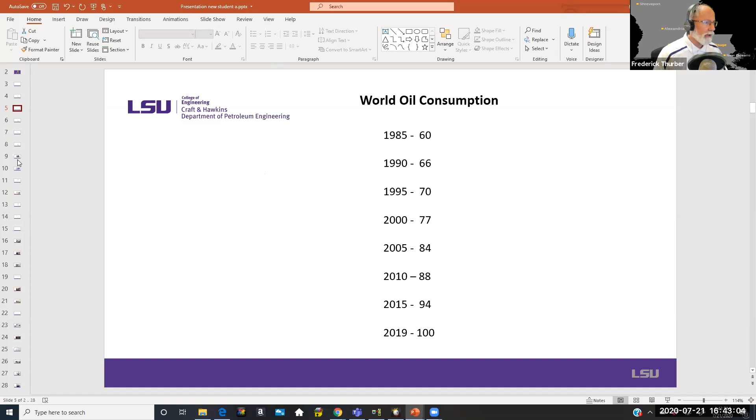We could say the same thing about India, another huge country population-wise. But also, what about other third and fourth world nations? Without enough energy, without enough raw material to build the products we use today, third and fourth world nations don't have a chance. So I believe this is a wonderful career path as you move forward, and we'll talk more on that as we go.

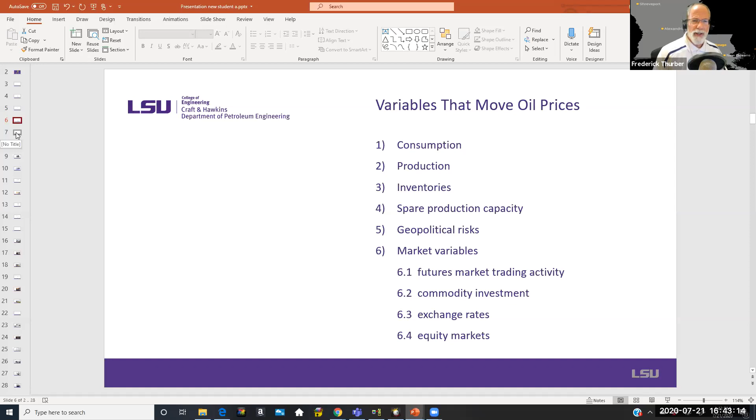The second one's production. Some people thought, well, maybe we're just running out of oil because we've produced it all. But if you look at U.S. crude production from 1940 to 2019—actually from the beginning of time, that first well, all the way up—it was increasing until 1970, when we hit a record in the United States of 9.64 million barrels of oil per day. Now if you look, we started to slide.

However, that slide decreased and you saw two small humps right here. What happened is the price of oil at this point was very high and a lot of people were investing in finding new sources of oil. We had in the early 70s the Arab Oil Embargo, and the price of gasoline doubled in a very short period of time, almost overnight. Then we started seeing a decrease in production in the mid 80s, and that decrease continued until about 2008.

In 2008 we started to see an increase, a rapid increase. In fact, in 2019 we were producing 12.23 million barrels of oil per day, a new record for the United States. Why were we doing this? We were doing this because we have engineers to produce oil.

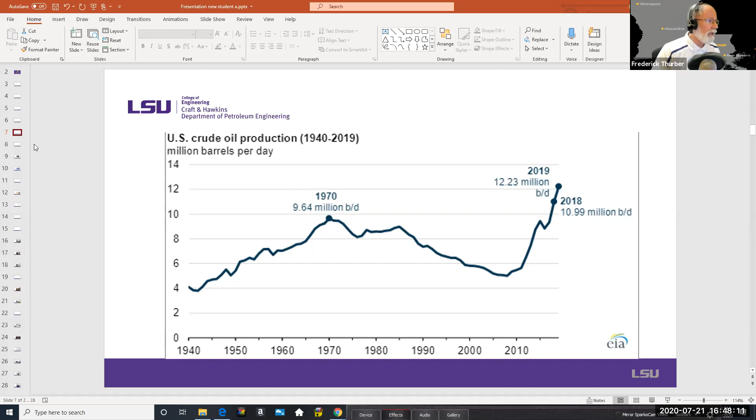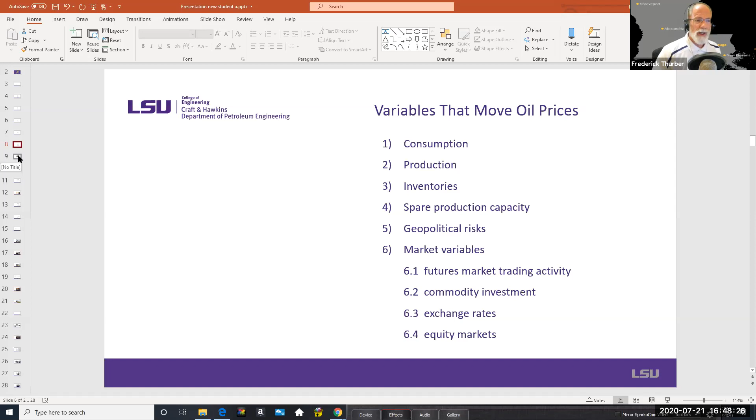So we start producing a lot more petroleum. Of course, there's a lot of others. Inventories are very important, and I'm going to tie inventories and spare production capacity and geopolitical risk together just to show you how these come into play when you're looking at the price of oil.

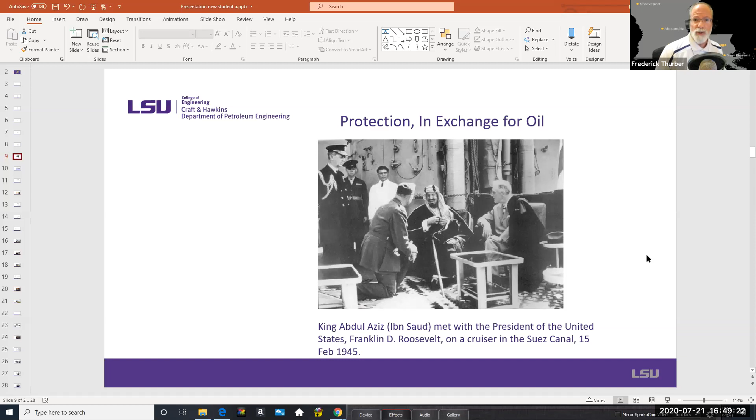This is the king of Saudi Arabia with Franklin Delano Roosevelt in 1945. They were negotiating in the Suez Canal, negotiating a deal where the U.S. would provide protection so Saudi Arabia could sell its oil. The U.S. would keep the sea lanes open, and in exchange that oil would flow to the U.S. and to our allies. Every president since Franklin Delano Roosevelt, be it Democrat or Republican, has pretty much honored this agreement, has worked with Saudi Arabia. Even though Saudi Arabia is definitely a different system than the system we have—there is a kingdom in Saudi Arabia, not a democracy.

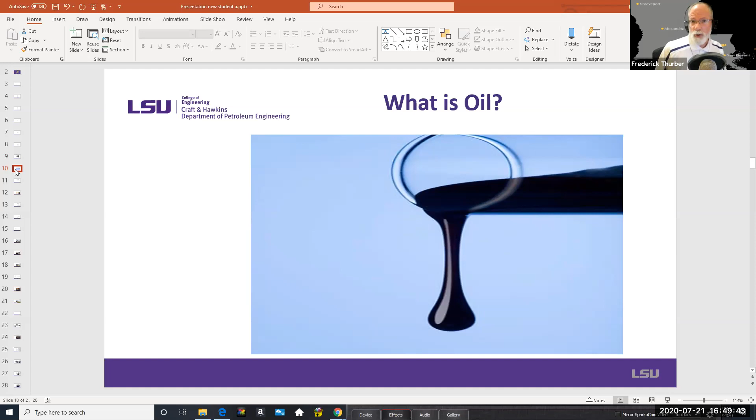Well, what is oil? We talk about oil as if it were one particular product, but what you've got to remember: oil is hydrocarbons. But there's a lot of different types of hydrocarbon structures. So what is oil? Let's look at it. There are many different types of oil: crude oils, heavy oils, extra heavy oils, natural gas liquids, ultra deep oils, tar, oil sands or bitumens, a condensate from tight shale oils or oil shale, which is kerogen.

How do we measure oils? Well, the principal measurement—there's a number of measures you will learn when you go into the program. In fact, you will learn in the introductory program how we measure oil. But one of the majors is to measure the specific gravity of oil. In the oil industry, we like to use a standard called API, American Petroleum Institute. They set the standard for the oil industry. And I think because engineers really don't like, petroleum engineers anyway, don't like to deal with fractions.

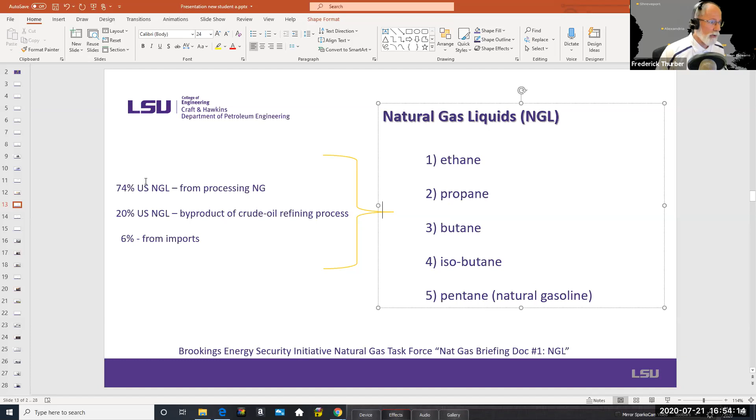I will put you in PETE 1010, first semester or second semester, you're here. PETE 1010 is an introductory class to help you decide if this is really your cup of tea, if this is really what you would like to do.

A lot of students come into petroleum engineering because, typically with the 24 years I've been here, all but maybe 4 or 5 years, petroleum engineers tend to have the highest starting salaries. But it takes more than that. If this is going to be your career path, it has to be something you develop a passion for, something you will like and you'll enjoy.

What will students learn? We go into current events, sometimes past events, looking at history. We look at strengths, weaknesses, opportunities, and threats - the good and the bad. Current events sometimes are positive toward the oil industry, sometimes they're negative, but we need to talk about that so you understand what this industry is all about.

Of course, you're going to learn about geology and rock and fluid properties. Very important. You see, if I were a chemical engineer, I might be flowing gasoline through a 3-inch pipe, and I would know the properties of the gasoline, the pressure and the temperature inside the pipe, the diameter of the pipe. I would know all of this. I could predict how much gasoline would go through at any period of time.

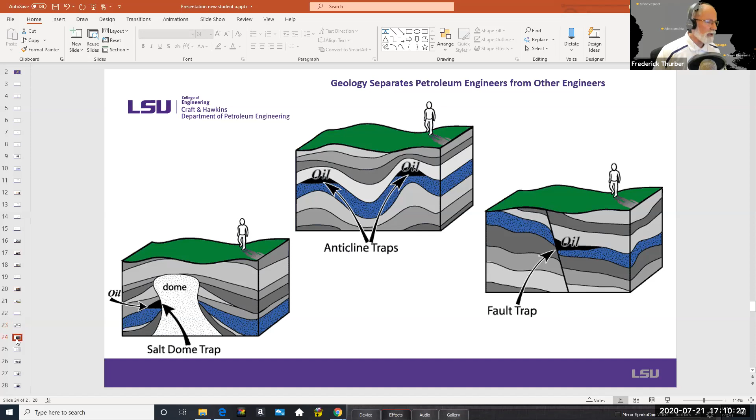And we just moved through here. I talked about this a little bit earlier, conventional reservoirs where the oil would flow from one pore to the other. That's a conventional reservoir. In shale reservoirs, these pore spaces are not connected. A little bit different.

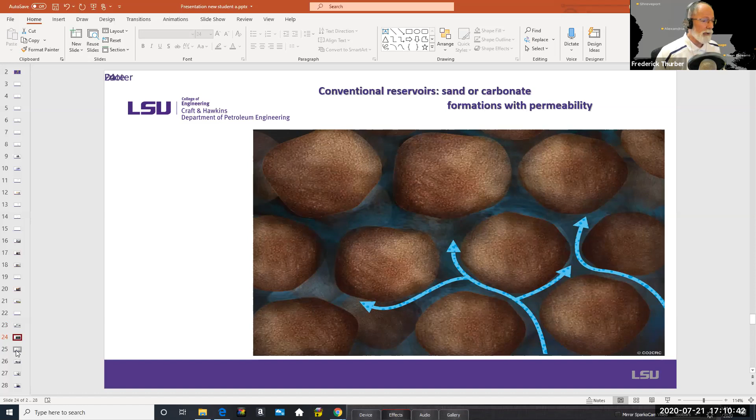We talked about well logging or formation evaluation, becoming a petrophysicist, a type of petroleum engineer. This is where we run sophisticated tools down on a wire line, and as we pull them up, we start taking measurements. I'm going to show you something in a moment, so we won't go into depth on what this is.

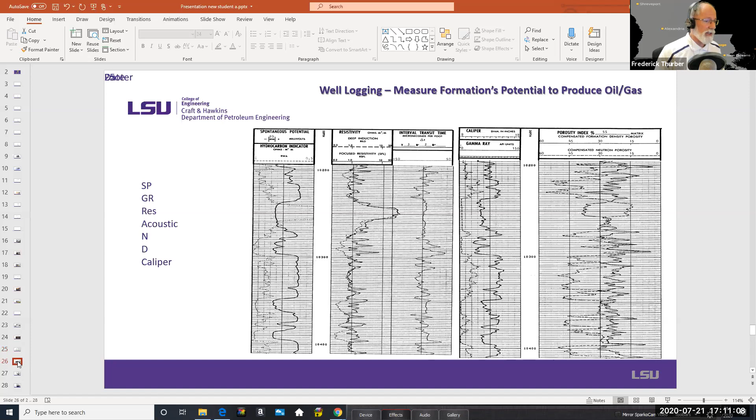We have to understand the reservoir itself. Does the reservoir have oil in it with dissolved gas? Is it oil with gas that is separated from the reservoir? Or is it a combination of both? This would be like a Coca-Cola, would it not? If you pop the top, there's gas that escapes, but there's also gas dissolved in that Coca-Cola. Now, naturally, it's not a hydrocarbon, it's carbon dioxide in Coca-Cola, but there is gas. And if you open it up and leave it on the counter and forget about it, come back the next day and try to drink it, it's going to be flat, the gas will be gone. So you have to understand the reservoir, because all of this depends on how you're going to produce it.

Worldwide, we leave about 64% of oil in the ground. When I first came here, it was about 70% left in the ground. So we're improving, but every reservoir is different.

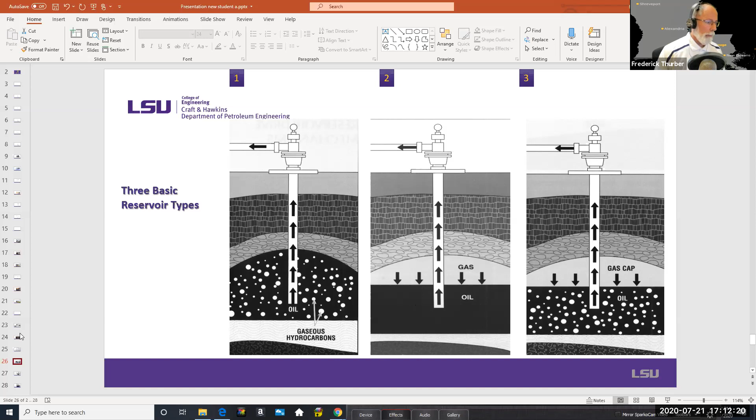Reservoir engineering is quite interesting. Sometimes we drill one well to produce oil, and on this well we have a pump that will pump the oil out of the ground. Some wells flow on their own, you don't need a pump, but you also see 4 additional wells in order to inject water or some type of chemicals, such as surfactants or soaps, to be able to produce more oil from the reservoir. Real interesting.

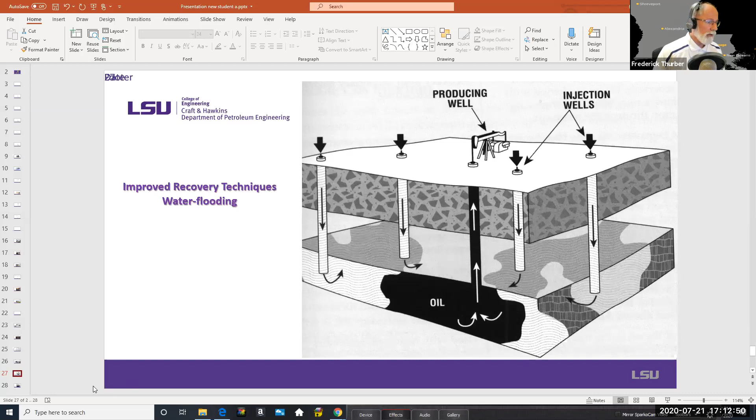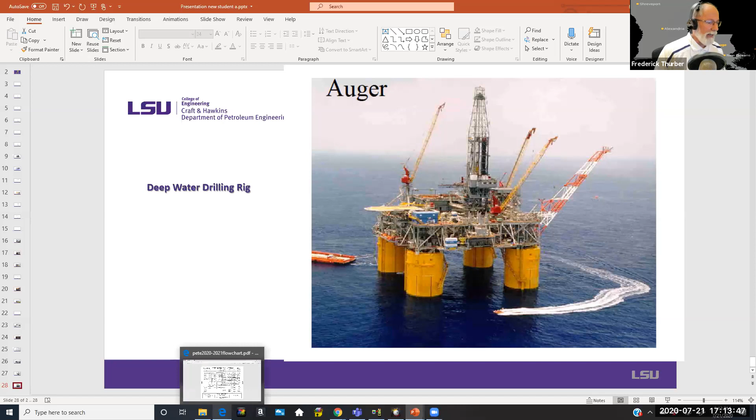And if you look at this rig, just to give you an idea of what type of operation this is. If you look at the derrick, the area that's going up, and you look at the dark things in the derrick, this is drill pipe, about 90 feet high. At the bottom is the floor where everything happens, where the drilling crew, the roughnecks, and the driller put the pipe in the hole and take it out to drill the well. There's a helicopter sitting on a heliport, 3 cranes, and an area to flare natural gas. Quite a setup.

Now what I'd like to do real fast is go through our program. Let's see if I'm staying on schedule. Okay, we've got a few more minutes, Dr. Thurber. A few more minutes.

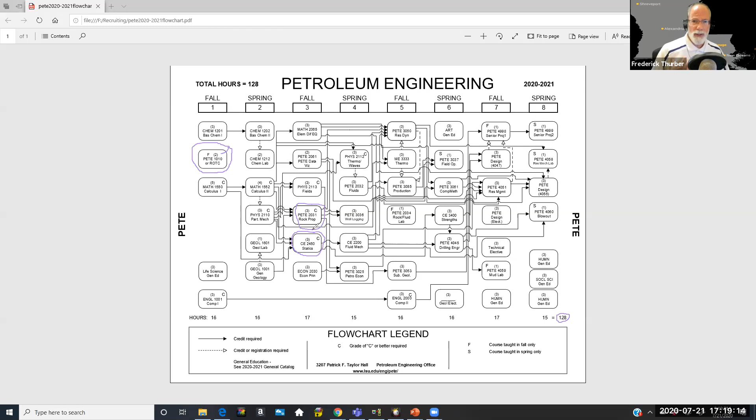We just want to be sure that you're staying with this program for the right reasons. We want you to succeed. The introductory class, some people put introductory classes as gatekeepers. This is not a gatekeeper. I teach it, I know. Don't misunderstand me, there will be students who make an F in that class every semester because maybe they go to the bars at 2 o'clock in the morning routinely. But if you put forth the effort, you're going to get through the class and probably earn a good grade. The purpose of that class is to help you understand if this is what you would like to continue to do.

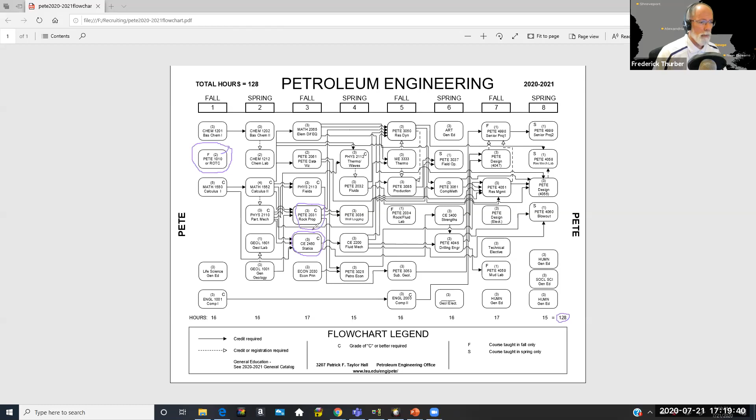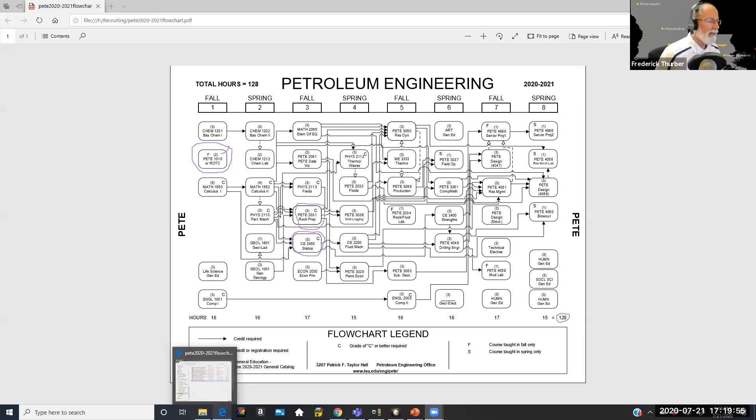Let's see now. I'm going to show you one other thing real quick. Whoops, let's go back to this. I'm going to go right here. Let's see if I can do this real quick. There we go, just erase that so we don't have a problem. I'm going to give you an example of... there we go.

Okay, I'm going to give you an example of a problem that you might have to work as a petroleum engineer, just to give you an idea. What if someone comes into your office after you've graduated, maybe you've been working for 5 years, maybe it was a classmate, in fact a friend with whom you've graduated from LSU's Craft and Hawkins Department of Petroleum Engineering. And he or she wants you to invest with them. And they believe they have a very large oil field, but they need money to develop that oil field. And so they're offering you a wonderful opportunity.

That's not unheard of, that's not uncommon. And they want you to invest $100,000. The reservoir covers 68.87 acres, the person tells you. So we know that 1 acre equals 43,560 square feet. So if it's 68, it's roughly about 3 million square feet.

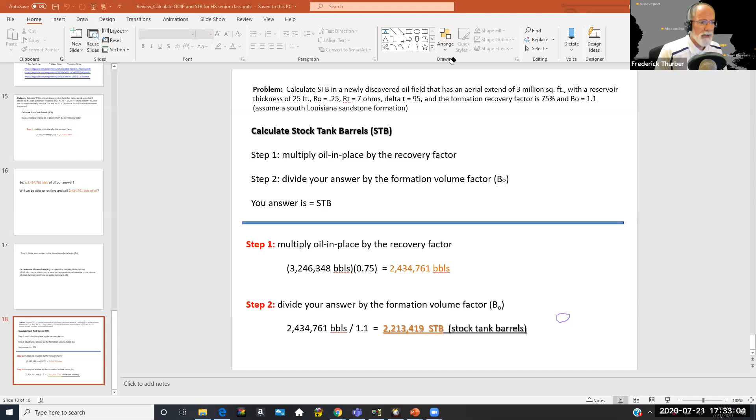That bubble has pretty much worked its way through the system now. I've been here 24 years. I would say other than about 7 of those years, maybe 6, students who were graduating in May had a job by the end of May, I mean before they graduated. And the exceptions to that would be the student who was very, very weak, and even that student would have a job by August.

I see us returning to that. Our program is a much smaller program. It's not just LSU, it's all of the major universities who have petroleum engineering. You've got to remember, not all universities have petroleum engineering. Every university has an engineering program, for the most part either civil, mechanical, electrical, industrial, some of the major engineering areas. Petroleum is very limited, and because of that, there's going to be a shortage of petroleum engineers, I believe, as we move forward.

If you would have graduated last May, yeah, it would have been tough to find a job. The price of oil was down, the need for petroleum was way down. Of course, a lot of career paths were in the same boat as petroleum in that respect. And our numbers from the larger class, when students came in while oil prices were high, the classes were relatively large. Those large classes are gone.